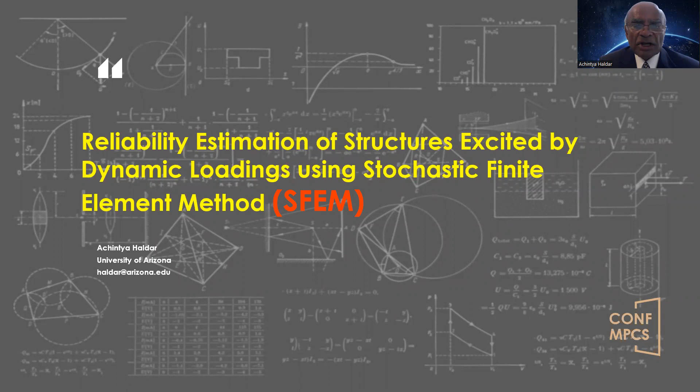I'll be talking to you on reliability estimation of structures excited by dynamic loadings using stochastic finite element method.

I have been working in this area for over 5 decades. I'm going to share with you some of my work. The motivation of developing stochastic finite element methods are the following. I'll give you the very basic concept first. It is basically integration of first order reliability method and FEM. Then I will introduce the concept of FORM 2. I will show some examples with a case study, and at the end I'll talk about performance-based seismic design, PBSD.

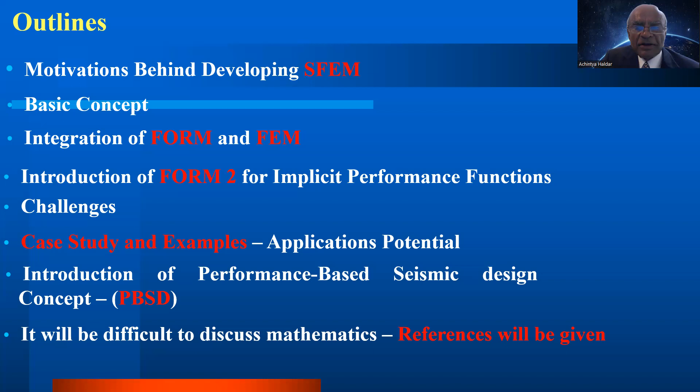Because of the difficulty of the subject, it is nearly impossible for me to talk the mathematics in detail. I will give you references at the end of my presentation.

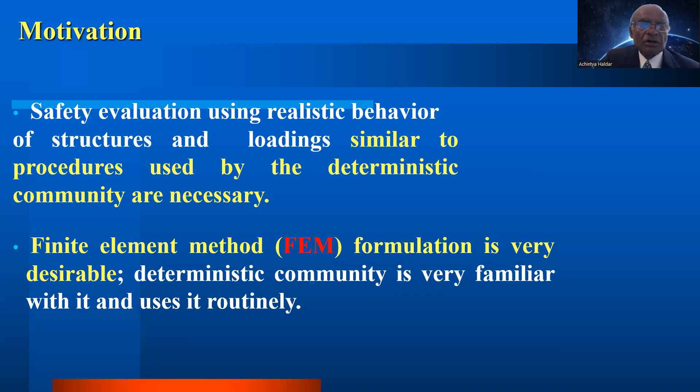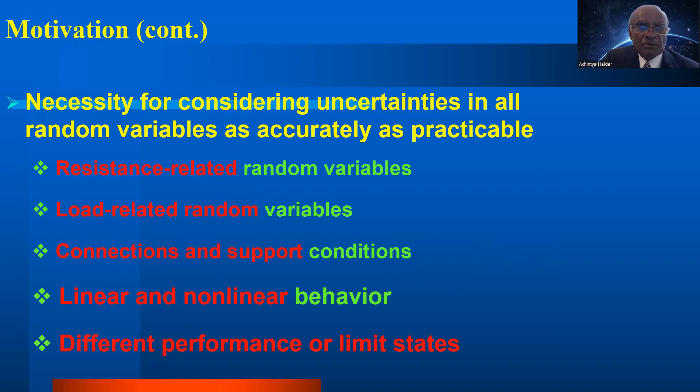Safety evaluation using realistic behavior of structures and loadings, similar to procedures used by the deterministic community, is necessary. Finite element method is very desirable because the deterministic community uses it very regularly. But what we have to do is include uncertainty in the finite element formulation. The uncertainty related to resistance, load, connection and support conditions, linear and nonlinear behavior, and different performance levels must be incorporated appropriately.

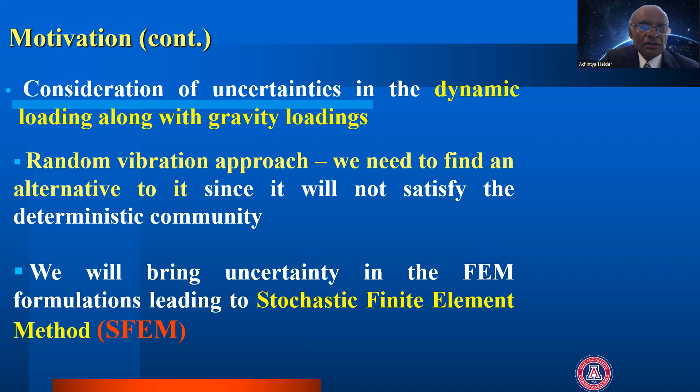Now, when we talk about dynamic loading, we could use random vibration approach, but it is not going to satisfy the deterministic community. That is the reason we have to develop stochastic finite element method.

When I was a student long time ago, we used allowable stress design concept. What we did, we reduced the load so that the structure behaved linearly, and the uncertainty in the load with the safety factor would basically give the safety for the overall design. Then for concrete, we started using ultimate strength design.

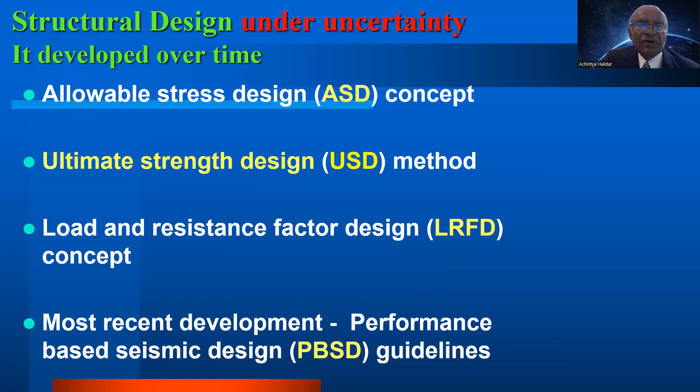When the design concept matured to consider uncertainty-related issues, we developed LRFD, load and resistance factor design concept, in the early 80s. More recently, at least in the US, we are trying to incorporate what we call performance-based seismic design guidelines. I'll talk very briefly later in the presentation.

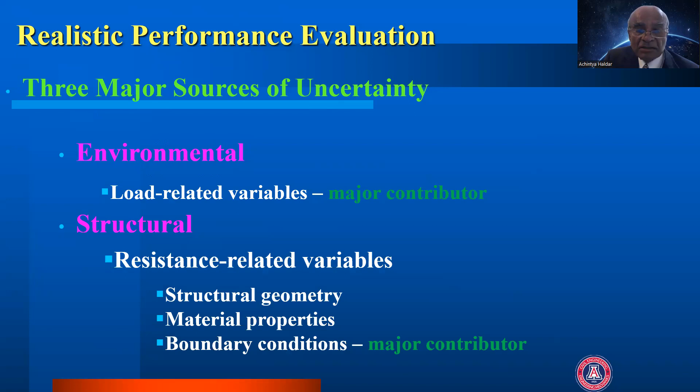Now, to consider realistic performance, we must consider uncertainty in the environmental loading, like earthquake loading, structural variables like structural geometry, material properties, and boundary conditions, a major factor. I'll talk briefly later. Boundary condition, basically, generally we assume fixed, pinned and roller.

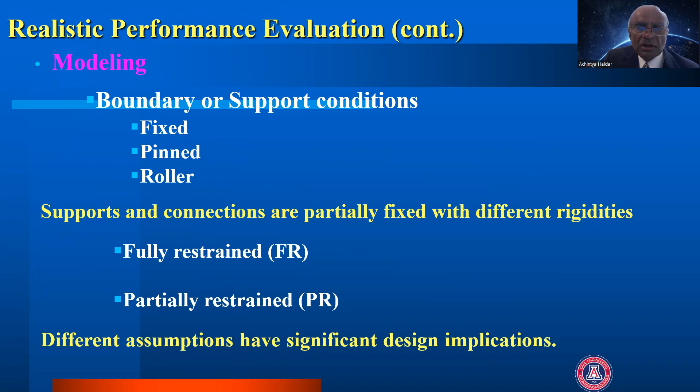In reality, there is no fixed support. Moment of inertia of the support must be infinity. Most of the connections are either fully restrained or partially restrained. And if we make proper assumption, appropriate assumption, our design would be very, very different.

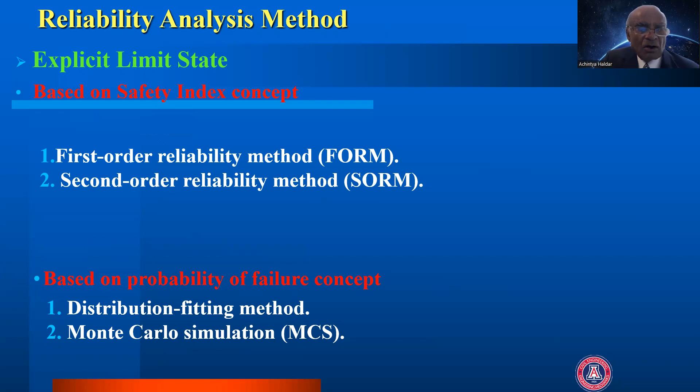Now, our reliability is always estimated with respect to a performance function or limit state function. When the limit state can be expressed in terms of all the design variables and the performance requirement, we call it an explicit limit state function. For that, we can now use what we call first order or second order reliability method, or we can also use Monte Carlo simulation method.

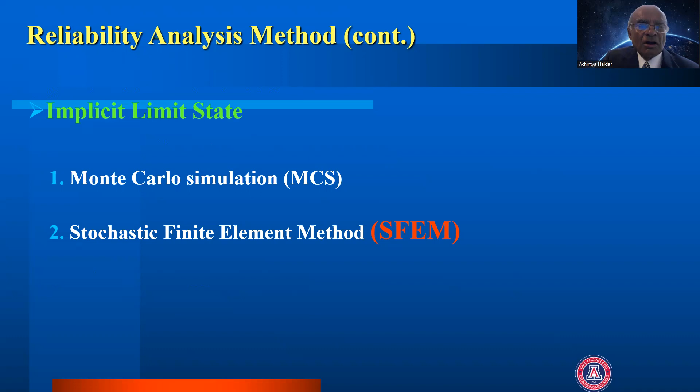But when the limit state function is implicit, it is a very, very difficult problem. For that, we could use Monte Carlo simulation method or stochastic finite element method, as I'll be talking here today.

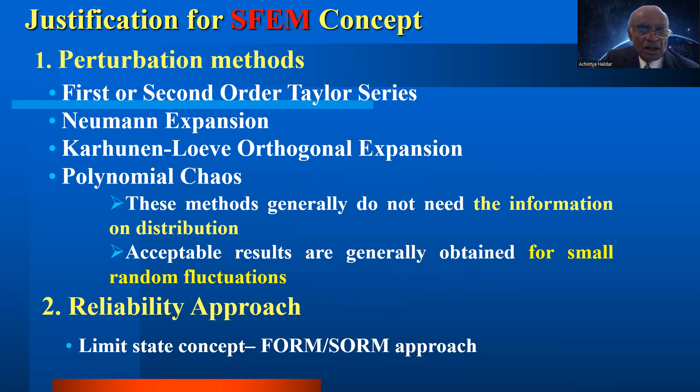Now, for stochastic finite element method, why do you develop it? There are other methods you can use. You can use first order, second order, Taylor series method, Neumann expansion, Karhunen-Loeve orthogonal expansion, polynomial chaos. These methods generally do not need the information on distribution, and acceptable results are generally obtained for small random fluctuation. In that case, really, a FORM-based approach would be appropriate.

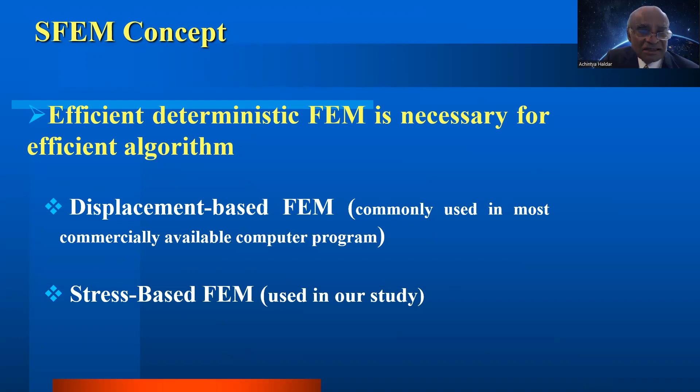When you use any finite element algorithm, efficiency of the algorithm is very important. Most of the time, people use what we call displacement-based finite element method. All the computer programs commercially available or in use are based on displacement-based finite element method. We use what is called stress-based finite element method. It is a little bit complicated, but it has many desirable features, particularly when you need to consider uncertainty in the variable. As I said before, I wrote a book on the topic, and it is published by Wiley.

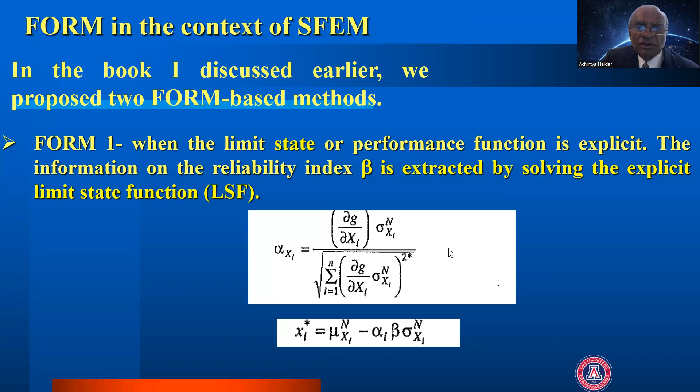I'll talk a little bit more about it a little bit later. Now, in the context of first-order reliability method, we call it FORM method 1. It is basically when the performance function is available in explicit form. What we do is calculate the direction cosine at the checking point. When it converges, we put it into the equation, since it is available, and calculate the reliability index beta. So it is very straightforward, so the basic concept is there.

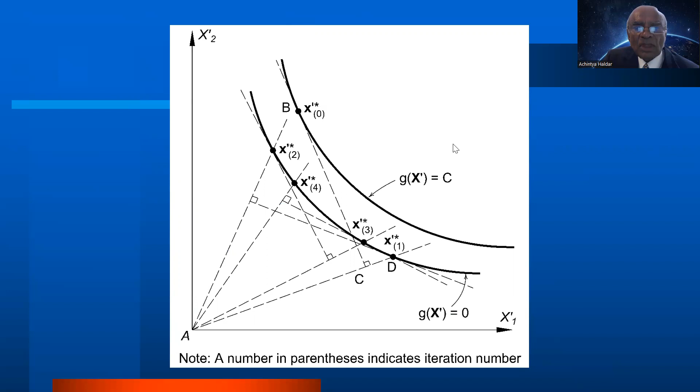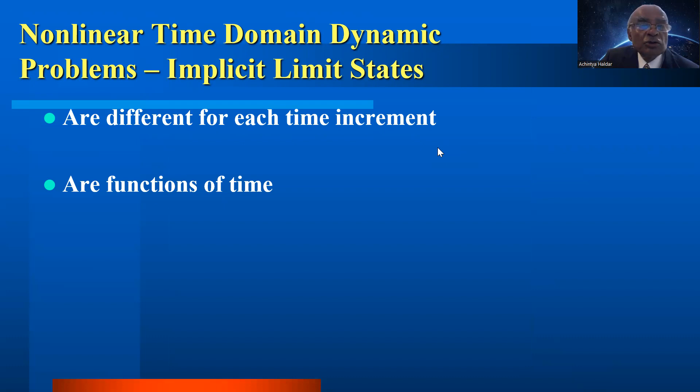Now, for our problem, as I said, our limit state function is implicit. We do not have that equation we are talking about. So what we did, we tried to combine assumed stress-based finite element method with first-order reliability method, and that gave me the stochastic finite element method.

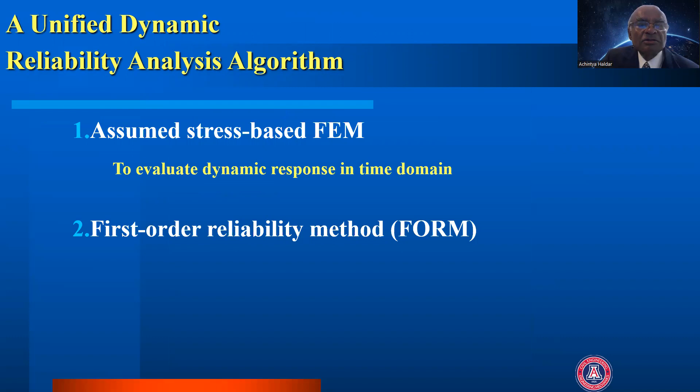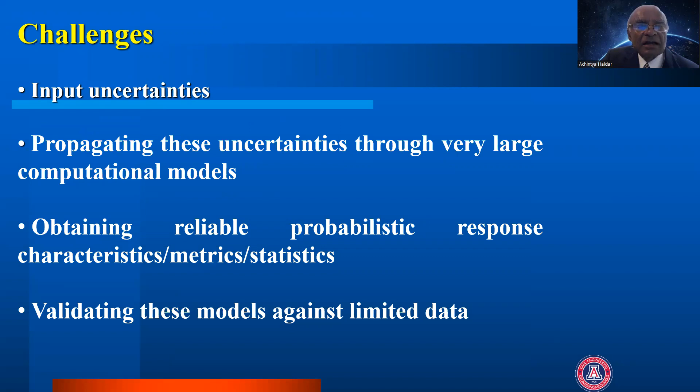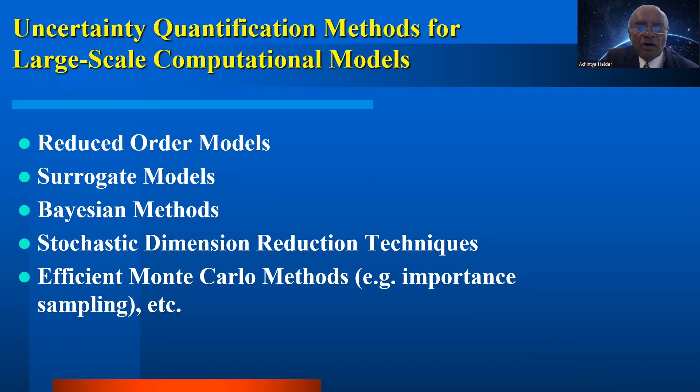When we are talking about large scale computational models, there are techniques I am suggesting here: reduced order model, surrogate model, Bayesian method, stochastic dimension reduction method, or efficient Monte Carlo simulation method. But they are not going to be applicable for our class of problem of interest, and that is why we need stochastic finite element method.

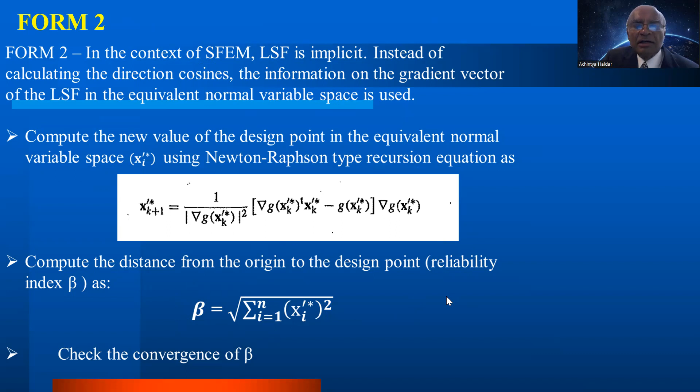Before we go forward, we have to talk about FORM method 2. It is basically developed for implicit performance functions. We cannot take the derivative of the limit state function directly, but we can do the derivatives numerically using a Newton-Raphson type recursion equation. In this case, instead of direction cosines, we calculate beta from the shortest distance from the origin to the performance function in the reduced variable space.

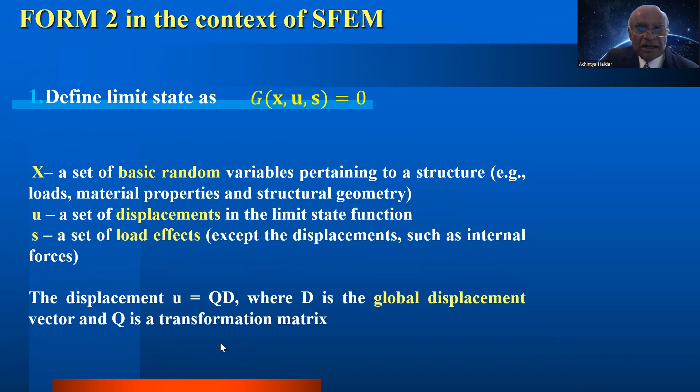So basically, in FORM method 2, as in FORM method 1, x is the random variable, u is the displacement in the limit state function, s is the load effect, and u we can express as QD, where d is the global displacement and q is the transformation matrix.

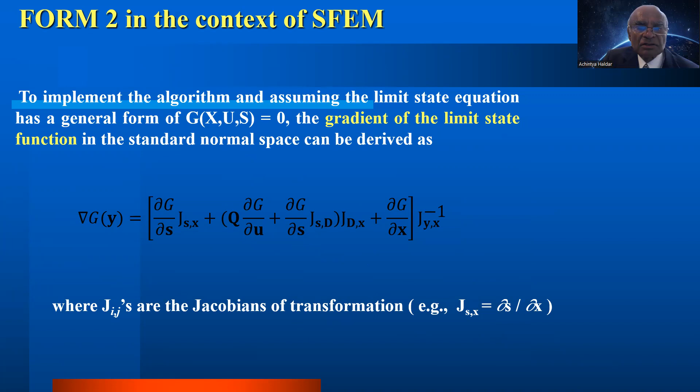To get that gradient vector form to implement FORM method 2, we need to follow these particular equations. There are Jacobians I am using - it is the derivative of a variable with respect to another variable. I cannot go too much into detail because it is complicated, but basically it tells us the basic concept is evaluation of 3 partial derivatives and 4 Jacobians.

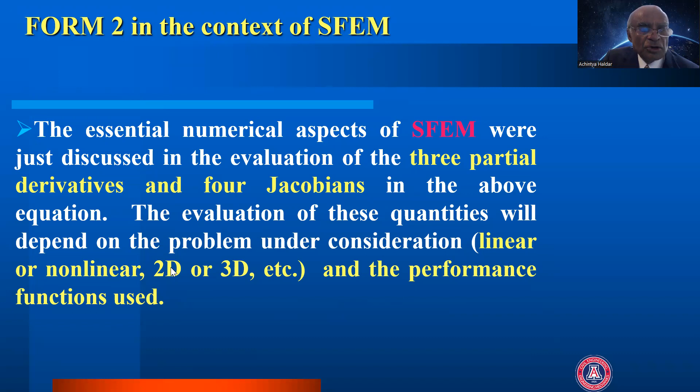These derivatives and Jacobians would depend on whether the problem is linear or nonlinear, 2-dimensional or 3-dimensional, and the performance function used, among other things. So for the limit state function, basically the iterative stage is the same thing we do for FORM method 1 - we are going to use the same iterative state and define the limit state function.

We don't really have, in this case, an explicit form, so we'll assume the initial checking point to be the mean values, and then we are trying to calculate the shortest distance using FORM method 2, and we'll get the result we are looking for.

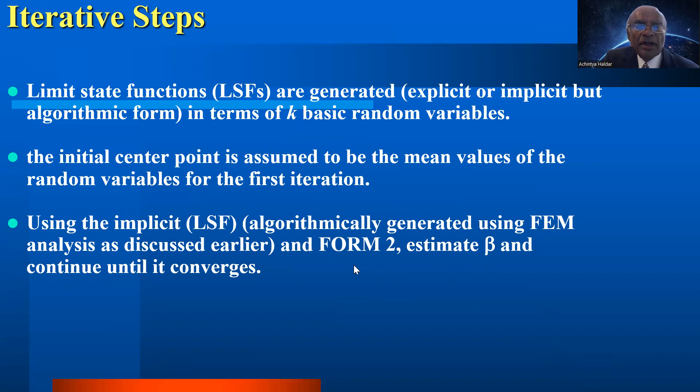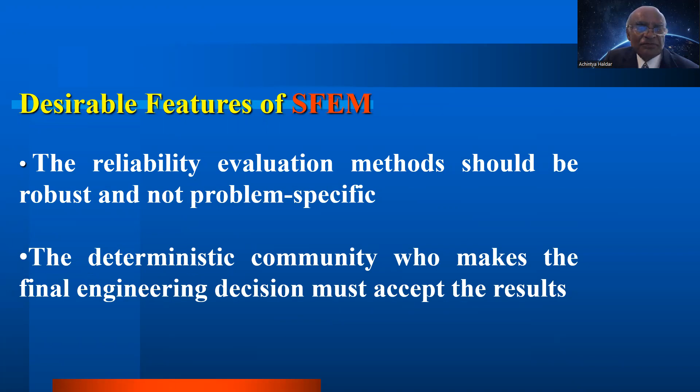The desirable feature of stochastic finite element is that reliability evaluation method should be robust and not problem specific. We can solve any type of problem using this particular concept, so long as it can be represented by finite element. And since the deterministic community is very familiar with classical finite element method, they are very willing to accept this particular concept.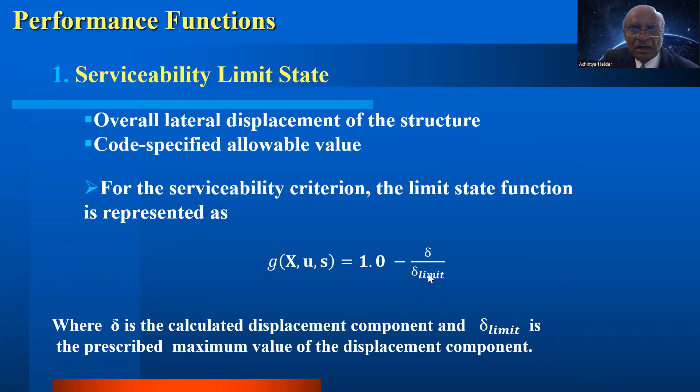Now, performance is always evaluated with respect to a limit state function. We call it serviceability limit state. We can define it this way: delta is the actual displacement, and delta limit is the allowable deflection, and we can calculate the corresponding reliability index using FORM method too.

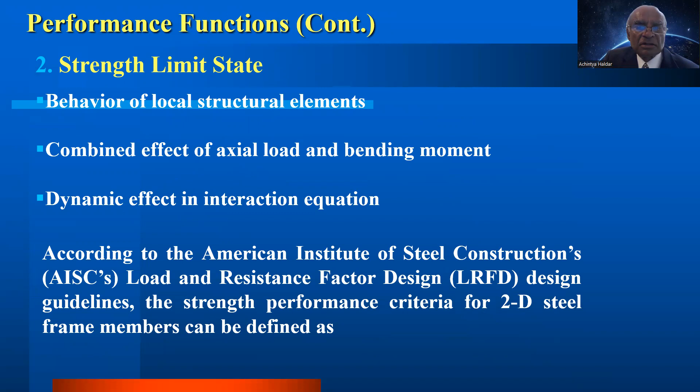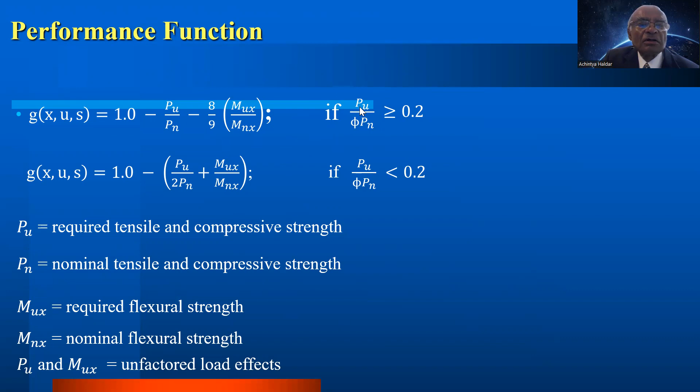For strength limit state, since we are going to use finite element method, every element, or most elements, have both axial load and bending moment. So we use the interaction equation of the form given in the AISC manual. Here, applied bending moment, axial load, bending moment capacity, and other things are given. These are the equations, at least in the US, we use based on the amount of axial load applied to the element, and we use that to calculate reliability for our structures.

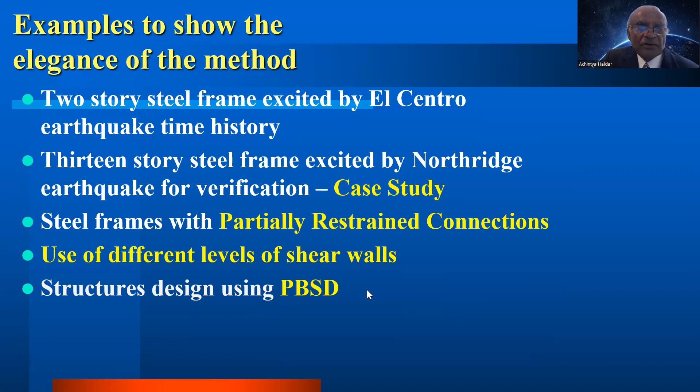So what we are going to do first is demonstrate the application of this concept for a 2-story steel frame building. Then, after that verification, we used a case study to show the application potential. Then we'll talk about connection rigidities - what is the implication if you use the connection rigidity more realistically? And then we are going to talk a little bit about performance-based seismic design.

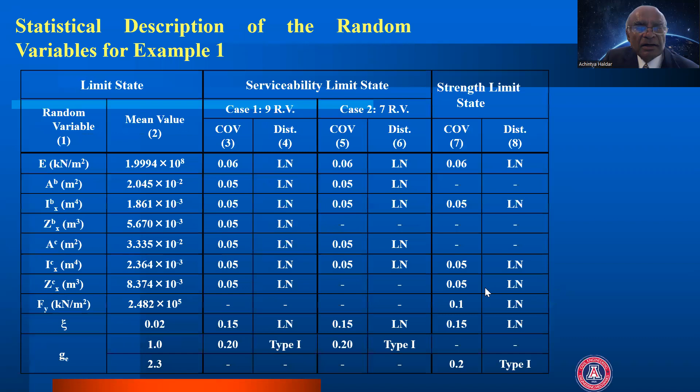So this is a 2-story building, very small. We excited it by an earthquake time history, and all the variables we consider are random variables, as you can see. And then we use serviceability limit state.

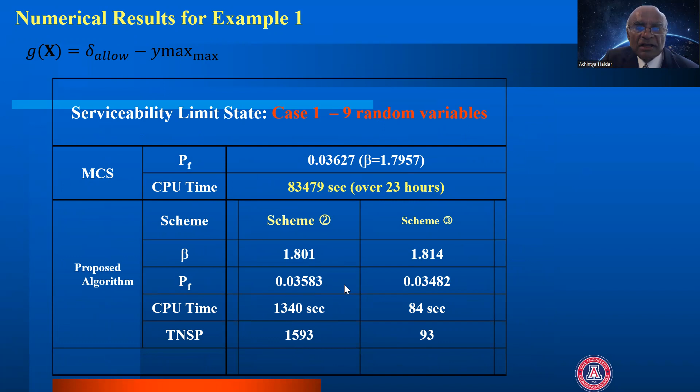In case 1, we use 9 random variables, and you can see Monte Carlo simulation may take 23 hours, but here we can get that result within a very limited time period. We also tried case 2 with 7 random variables - we disregarded 2 less important variables. Monte Carlo simulation required 23 hours, but again we got a very similar result, in a much more efficient way.

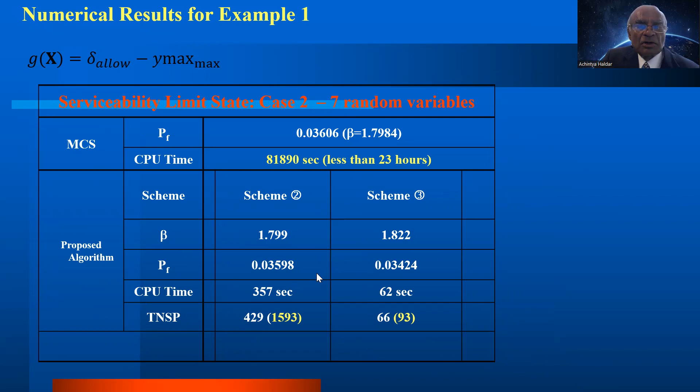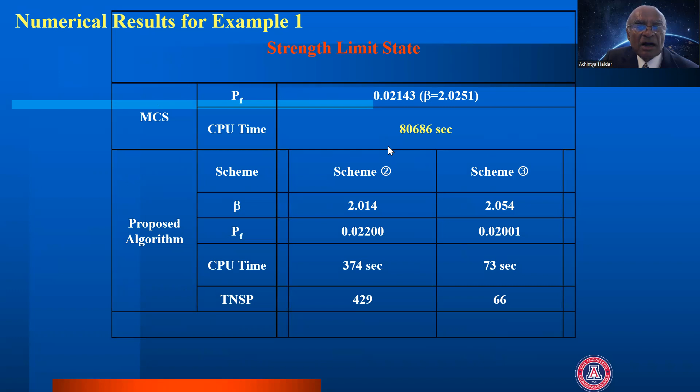When we talk about strength limit state, the same thing - here you'll find the beta value by Monte Carlo simulation and by the stochastic finite element method are very similar, but it is much more efficient. Again, it takes about 23 hours of execution, continuous running of the program.

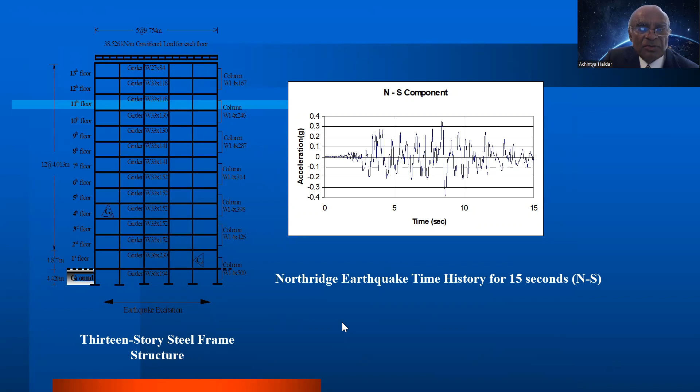And we took the time history recorded close to this particular building, and we tried to calculate the reliability index for interstory drift and the column. You can see for allowable, reliability index is negative for all three cases. Reliability index beta, when it is 0, probability of failure is 50%; when negative, more than 50%. Serviceability probability of failure is 100%+, and for strength it is 90% or 86%. That means it is going to fail.

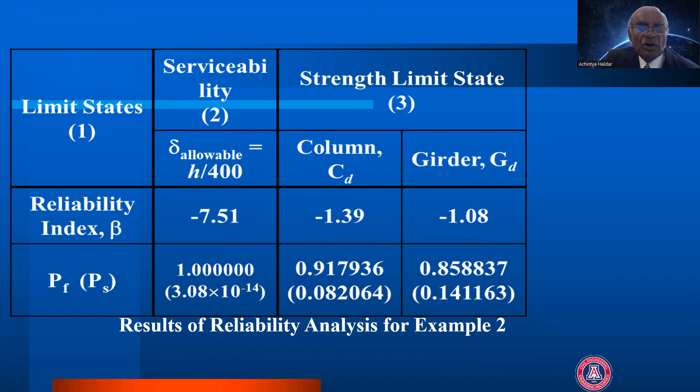So we are extremely satisfied that this particular algorithm predicted the behavior of the frame very, very accurately. It could be that building was designed long time ago. They did not check the serviceability limit state, and they also did not probably use nonlinear regression technique, only linear evaluation, and that may have caused some of those weaknesses in the design.

Now, next I want to talk very briefly about the flexibility of the connection. Generally, fixed support is not available, and flexibility of the connection is expressed in terms of a moment relative rotation curve. Here I am using an equation one of my colleagues developed, Ralph Richard. You can describe it in 4 parameters: elastic stiffness, plastic stiffness, moment, and the shape parameter.

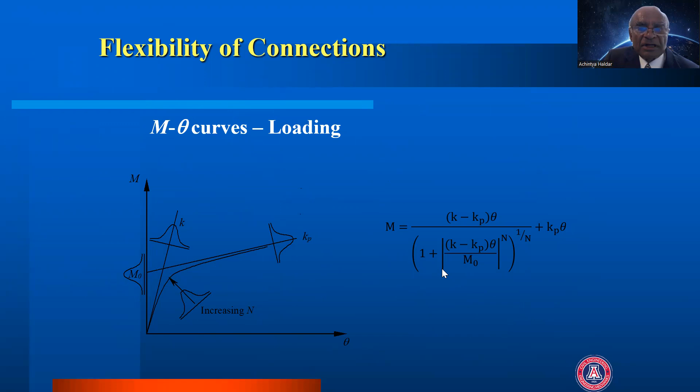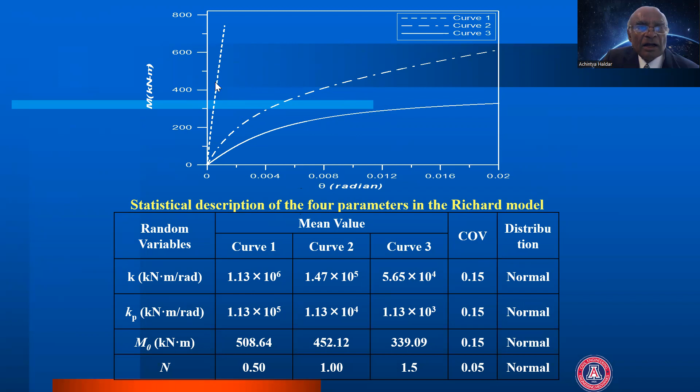Now, what we did, we took a 2-story building and excited it by a time history. Instead of using FR connection, we assumed it to be partially restrained connection. We assumed it to be curve 1, curve 2, and curve 3. Curve 1 is very close to FR connection, curve 3 is very thin connection, and curve 2 is in between. Here we calculate those 4 parameters of the Richard curve.

We estimated uncertainty in the variable, and we calculate the reliability index for FR connection and PR connection for curve 1, curve 2, and curve 3. You can see curve 1 is close to FR connection, but the beta value for serviceability and strength limit state are not the same.

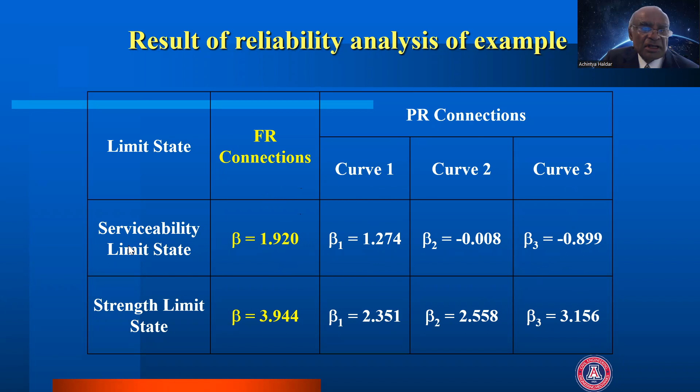You can see FR is giving very, they are saying it is safe, but it may not be safe even if we use some PR connection. And you can see when it is curve 3, it is the weakest one. Reliability index could be negative for both curve 2 and curve 3, indicating that it is not going to survive.

Then very briefly, we want to talk about performance-based seismic design. In the past, we designed for life safety. But now we realize most earthquakes cause significant damage, and tremendous loss of economic activities of the region. So this design concept gives the engineer or the owner alternatives to satisfy different performance requirements under some reliability requirement.

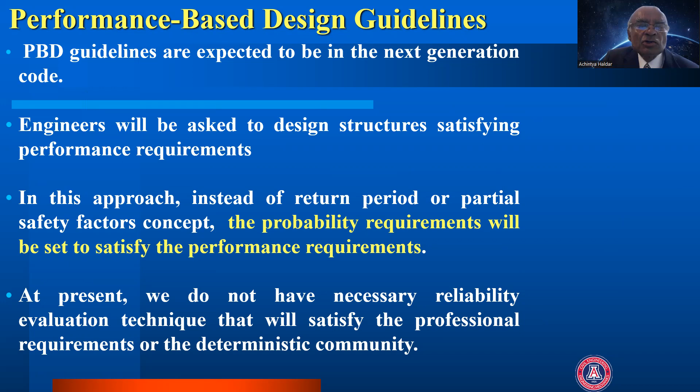It is a very sophisticated reliability-based method, but the code committees or PBSD committee did not suggest what method to use. Actually, there is no method available to calculate the corresponding reliability.

The basic concept is that after earthquake, if you want the user to go back, it is called immediate occupancy. Then old practice life safety, and it is called collapse prevention. We want to prevent. This is a new concept. We are going to talk about it a little bit later.

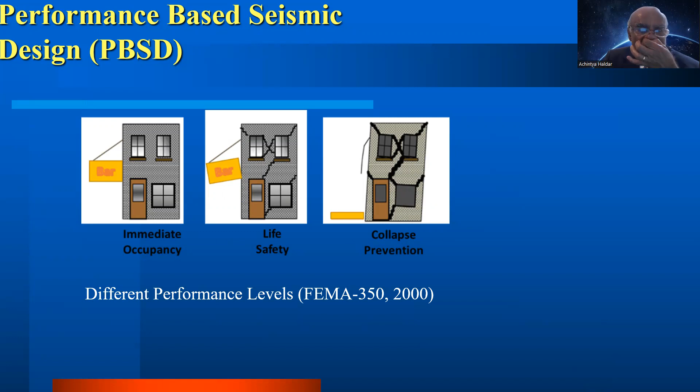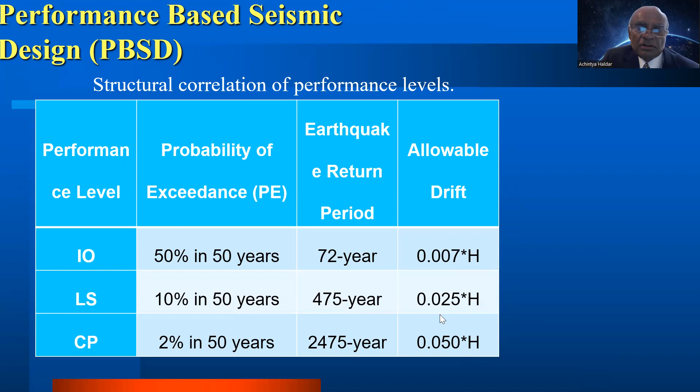And these 3 levels are in terms of return period. You can see life safety is 10% in 50 years, or return period of 475 years, and collapse prevention is almost 2,500 years. You can control that by defining allowable drift. Allowable drift for immediate occupancy would be very small compared to collapse prevention. It is common sense you can use to figure out this thing.

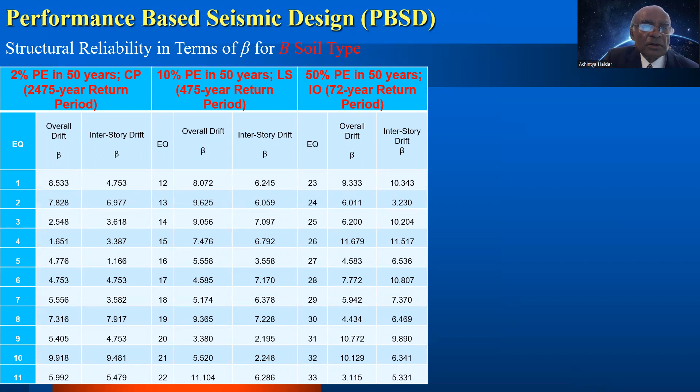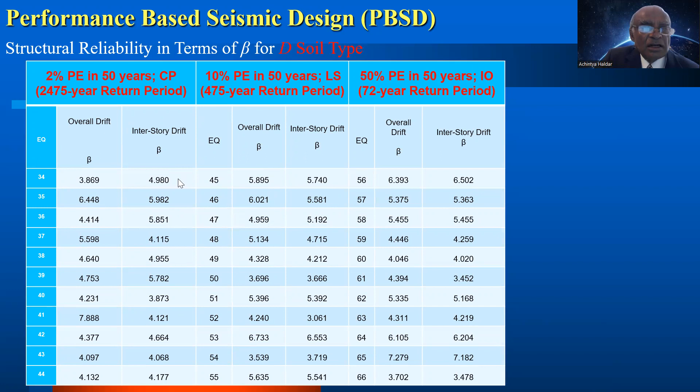I then take soil type D. If you do not have the soil site information available, in America, we use soil type D, and you can see we again calculate the corresponding reliability index, and the reliability went down significantly for soil type D.

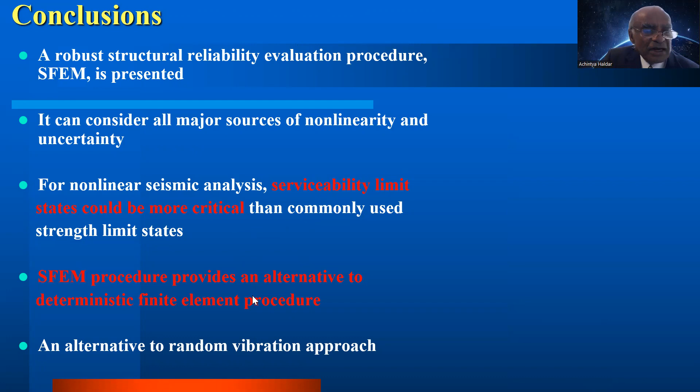So to conclude my discussion, we really developed a major reliability evaluation technique. It would take all sources of nonlinearity and uncertainty. We identified that serviceability limit state could be more critical than the commonly used strength limit state. It would provide an alternative to deterministic finite element method, and it is also an alternative to classical random vibration approach.